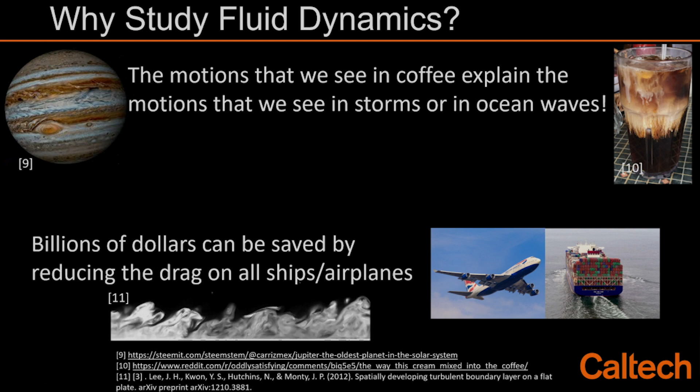Here you can see two different aspects: planetary things like Jupiter, and things as small as in a cup of coffee. There's also billions of dollars you can save if you understand turbulence, like the drag that certain bodies experience moving against oceans or air.

If you've all heard about air resistance or drag, that's one thing we want to try to work on. There are several ways to study fluid dynamics. The first is going through an analytical route, which is what people have been doing for maybe the past couple hundred years, and it involves studying the equations of motion that govern fluid dynamics.

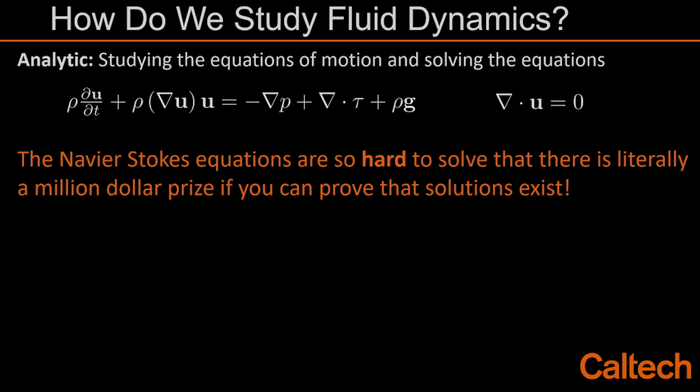These equations, the Navier-Stokes equations, are so hard to solve that there's literally a $1 million prize for anybody who can just prove a solution exists. It seems pretty trivial, but there's actually a lot of math going on. There are several branches of math you need to understand to understand this equation.

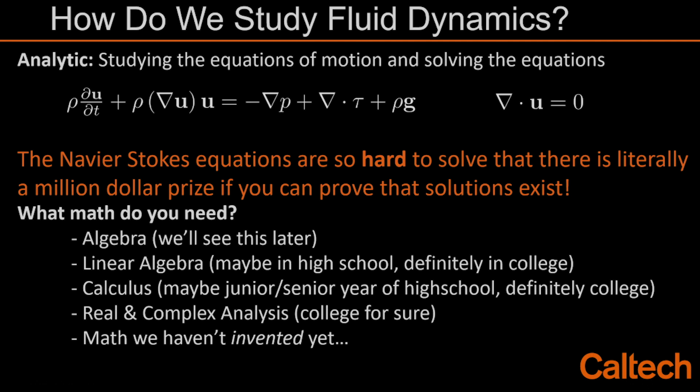You need to understand algebra, and I'll show you an example of how we need it. You need linear algebra, which you'll maybe see in high school but definitely in college. You need calculus, which you'll see at the end of high school and maybe the beginning of college. You also need real and complex analysis, seen at the end of a college math degree. And finally, there's math we haven't even invented yet—avenues we haven't explored that can still be discovered.

Because the fluid dynamics equations are so hard to solve, but we still have to deal with them, there are several ways we can get away without solving the equations directly. The first way is by simulating the problem with computers.

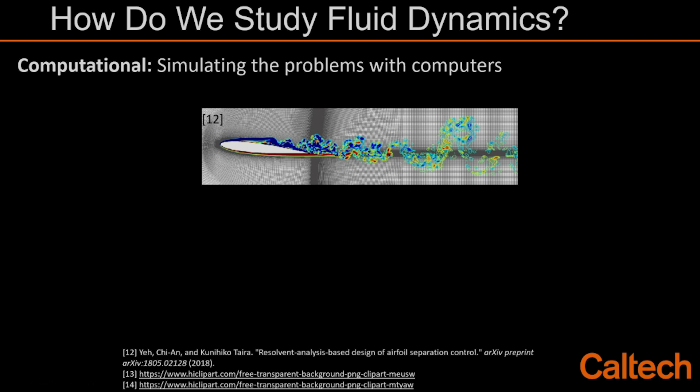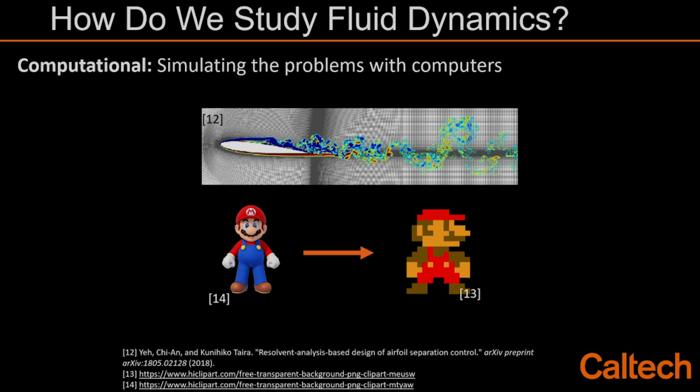One way to think about this is a video game. On the left, we see a pretty rendered image you'll probably see on a Nintendo Switch. On the right is what I grew up with, and maybe your parents grew up with, playing video games. You can see how boxy and square the one on the right is, and how smooth the one on the left is. We can think of the one on the right as a simulation because it's supposed to represent the one on the left.

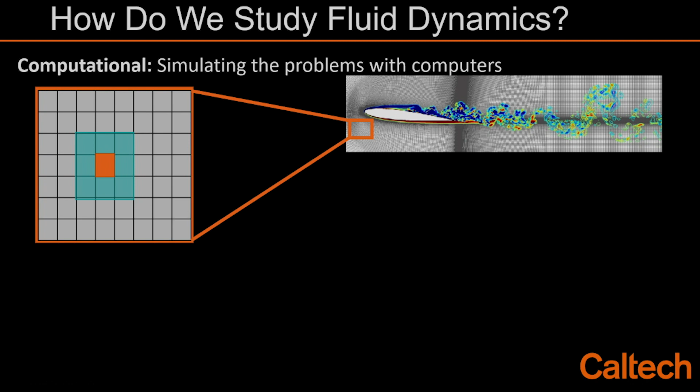The way it's done is the simulation takes a field—for example, the air around the airplane wing—and breaks it up into little squares, tiny cells. Then it basically does algebra: it takes one cell, and based on the cells around it, solves for what's going on. Because you're simulating on these tiny little cells, you can treat the problem as an algebra problem, and all you have to do is solve these algebra problems for everything on the field.

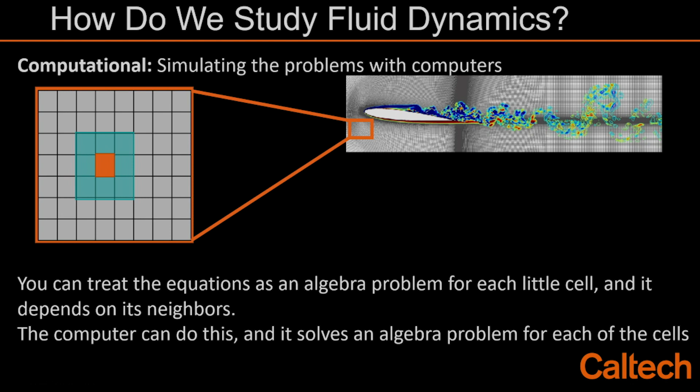Back in the day, if you watched Hidden Figures, this is something people actually had to do by hand—there were whole offices of people computing these things by hand. But nowadays computers can do this for you. They're so efficient that they can compute all these algebra problems in a matter of minutes or seconds, simulating the flow around an airplane wing.

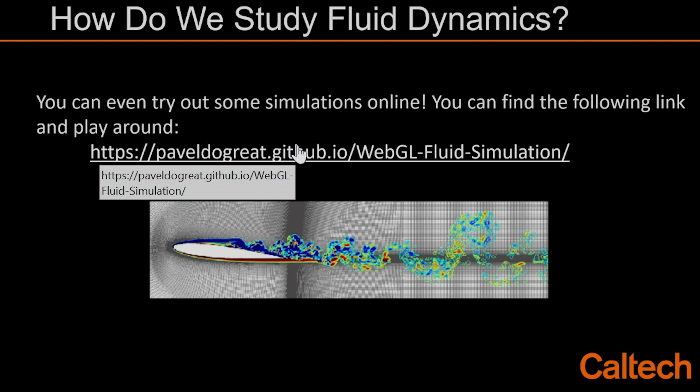We can also see examples of these simulations, like this one we can access online by clicking the following link. In this simulation, we have fluid inside a square container, and if we move the cursor around, we can simulate what it'd be like to mix the fluid. You can probably try this at home by clicking the link, or even with a cup of milk and some food dye, tracing it around to get similar pictures.

The last way is doing things by experiments, where we take measurements in a controlled laboratory setting to simulate something in the real world. So again, we have the airplane wing, and we have air coming to the right of it.

This is what experimentalists look at. They put a bunch of particles in a flow field, let the flow move around it, and trace out where these particles move in the fluid. Usually you need photographs to capture this and see all these particles in motion. You can also think of it like a long exposure photo of a moving light, where you can trace out the light.

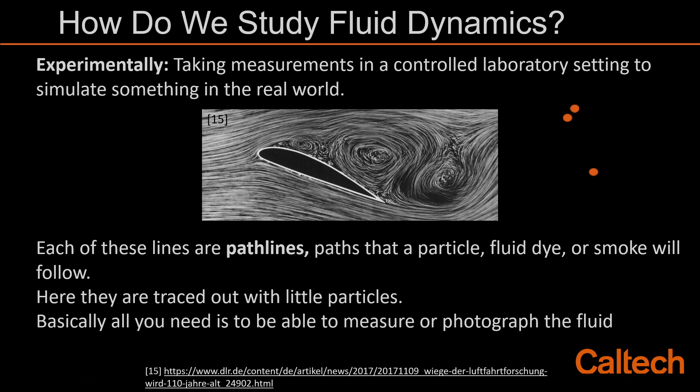So as good as these computations or experiments are, they still have hard parts, some things that keep them from being perfect. Computationally, computers aren't strong enough to simulate everything in the flow—just like the newest video game systems can't simulate every single thing in the real world. That's the trouble we're having with our simulations.

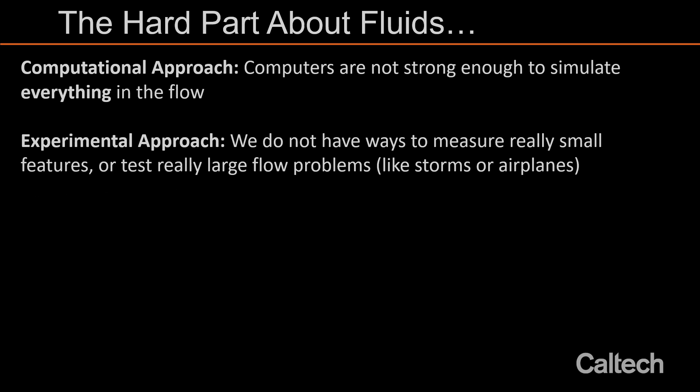Experimentally, the issue is that sometimes there are really tiny features or really big features that are hard to measure. One way to think about this is to consider a shark.

A shark is macro scale, maybe 10 feet long, and it has shark skin that makes it move very efficiently. That skin is micro scale, with features as thick as a human hair. If you really want to understand how a shark moves, you need to understand how its body behaves, but you also have to measure these tiny scales—the skin on the shark—to understand what makes it so efficient at swimming.

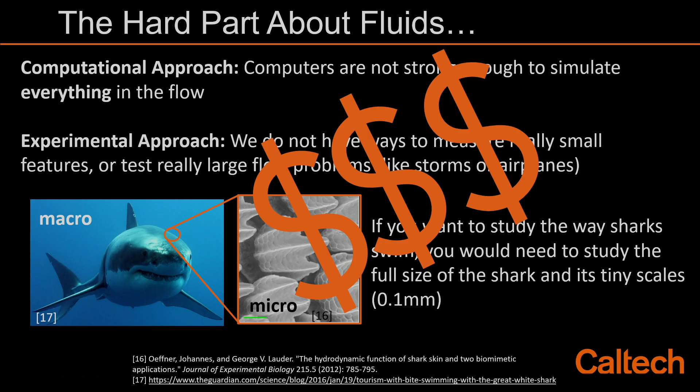What it really comes down to is that it gets expensive. You can probably do this if you throw enough money at it—get a bigger computer or more precise measurements—but sometimes it isn't affordable or practical to do this.

We have to understand the difference between a scientist and an engineer. A scientist tells us what's going on physically, helping us understand the equations, and is interested in understanding more about the natural world. An engineer, on the other hand, tries to solve these problems with the equations, simplifying as much as possible while still holding the relevant physics, to make progress and understand what's going on so you can make designs or predictions.

So what engineers do is try to model the fluid. To understand the Navier-Stokes equations that govern the fluid, we need to understand different fluid properties. Fluids have something called density, which is mass divided by volume—that tells us which fluid is heavier and which is lighter.

One way to think about this is by comparing familiar things, like a baseball and a tennis ball. Although they have about the same volume and size, the baseball is heavier than the tennis ball. This is because the baseball is denser, so it's heavier, and the tennis ball is less dense, so it's lighter.

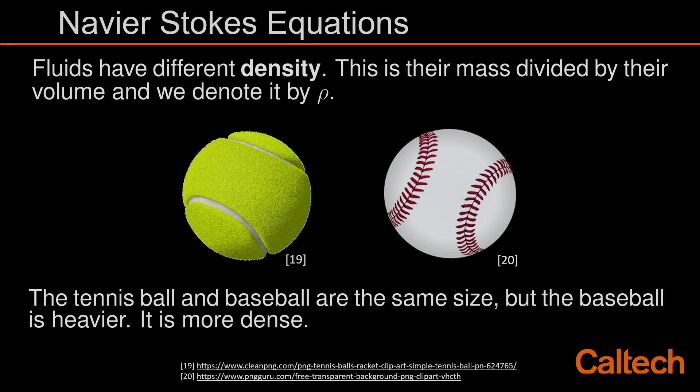You can think about this by considering what's inside the baseball. If you look inside, you'd see a bunch of material, but inside the tennis ball you'd see basically just the casing and air. Because of this, the baseball has more stuff, so it's more dense, whereas the tennis ball has less stuff and is less dense.

We can also understand how this works if we think about hot air. In a hot air balloon, you heat the air, and because it gets hotter, it rises. So hot air becomes less dense, and it's able to float when it's around cold air.

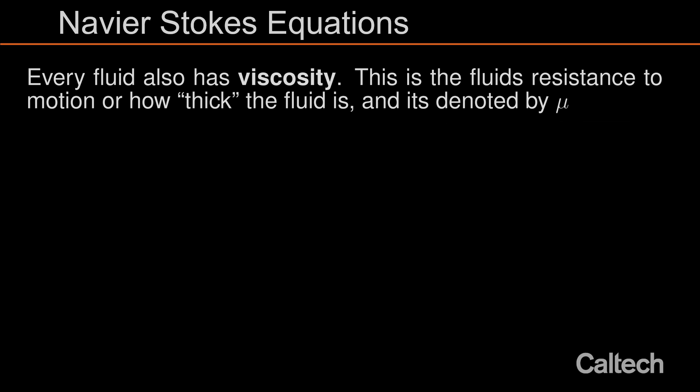The next of these properties is viscosity. Basically, viscosity is the resistance to motion. What we sometimes think about is how thick the fluid is, and we denote it by mu.

Another way you can think about viscosity is the difference between walking in our everyday environment where we're surrounded by air and walking in a pool where you're surrounded by water. If I walk around here, I have no issue and I'm able to move pretty freely. But if I walk around in a pool, I have to really struggle to move my body because I have to move against the resistance of the water. You can also think about this if you're trying to mix a cup of water versus a cup of honey.

The next thing we look at with fluids is their velocity, which is basically how each part of the fluid moves. There are different ways we can visualize the velocity, but ultimately this is what we try to capture with the Navier-Stokes equations. Basically, the Navier-Stokes equations are force equals mass times acceleration, so they're Newton's laws applied to a fluid.

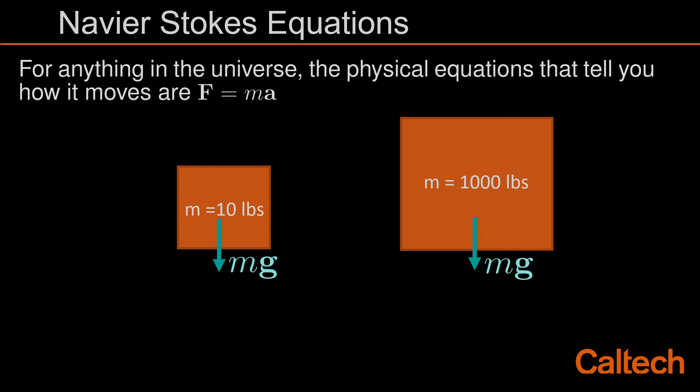So what F equals ma tells you is how much force I need to apply to move an object. Here I have two different boxes, one is 10 pounds and one is 1,000 pounds. Because they're on Earth, they have weight due to gravity, so they have a force due to gravity. If I want to move the boxes, I need to apply different forces. To move the 10-pound box, I need less force than to move the 1,000-pound box. So if you really want to move these boxes, you need to overcome their weight.

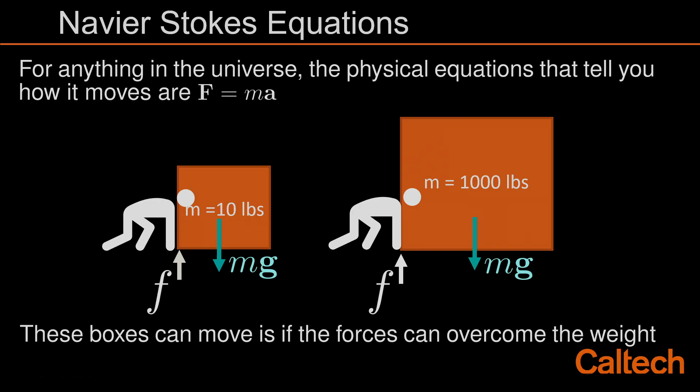There are several forces that act on a fluid. The first of these is pressure, the force from the fluid atoms as they move around, so it feels like something's pushing against the walls. Here in this balloon, we see all the little fluid particles bouncing around, trying to expand and push against the balloon. That's why when you blow air into a balloon, it expands, because the air molecules are bouncing around, pushing against those walls.

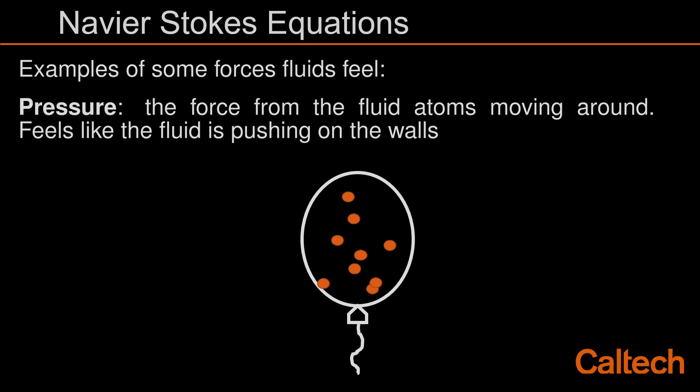If we put all of that together, we get the Navier-Stokes equations, and we can dissect each part. The first one on top basically tells us what comes in must go out. The second one is a little more complicated: force equals mass times acceleration. The stuff on the left-hand side is the mass and acceleration, where density comes in. On the right-hand side, we have all the forces: pressure differences, viscosity, and effects of gravity and density.

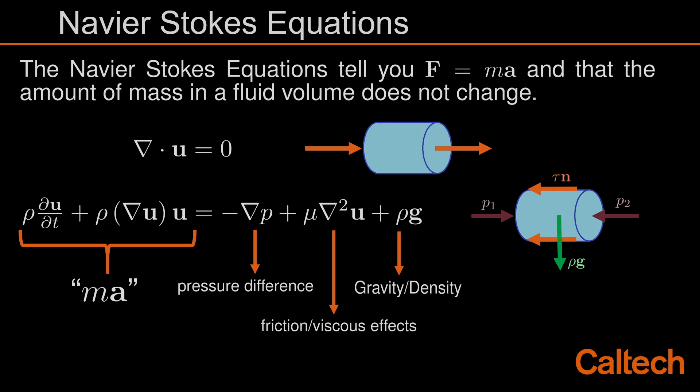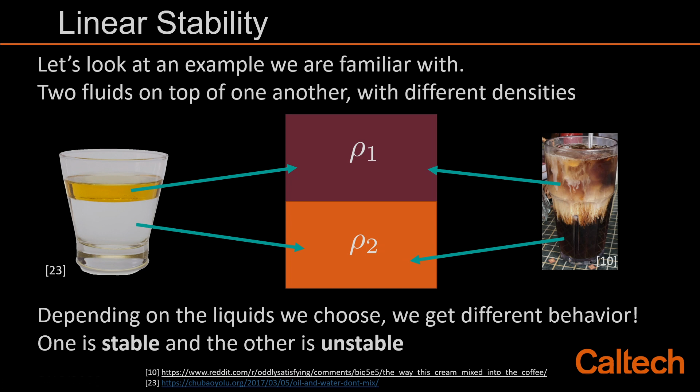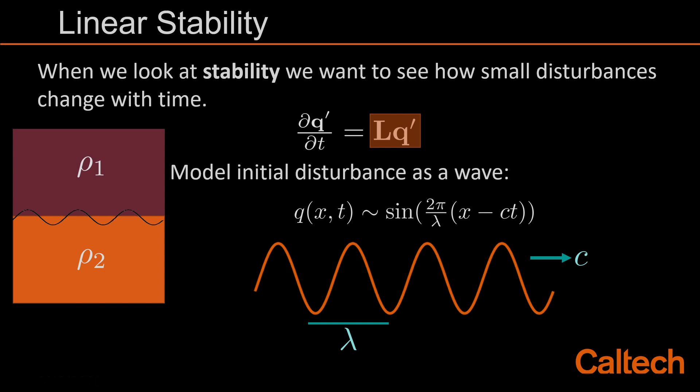So when we try to understand this, we call this stability. So we try to look at these linearized equations, and we try to model a disturbance between the fluid as a wave. So it has some characteristic length and some characteristic speed. And what we're interested in seeing is how this wave will grow as a function of time.

And it turns out that it grows by a growth factor. This growth factor will tell us if it's stable or unstable. So if it's stable, the disturbance won't grow. But if it's unstable, the disturbance will grow.

And we can look at this physically. So in the case where the disturbance doesn't grow, you can think about this as nice calm ocean waves. So when the ocean is really calm, like there's no storm or anything like that, you'll have that the waves just oscillate pretty nicely and they don't grow, they don't change, they just stay nice and uniform.

And we can also think of another case where it's also stable, such as when you have the oil and the water. So here, any disturbance between the two surfaces of the water, of the oil and the water, will just decay and shrink.

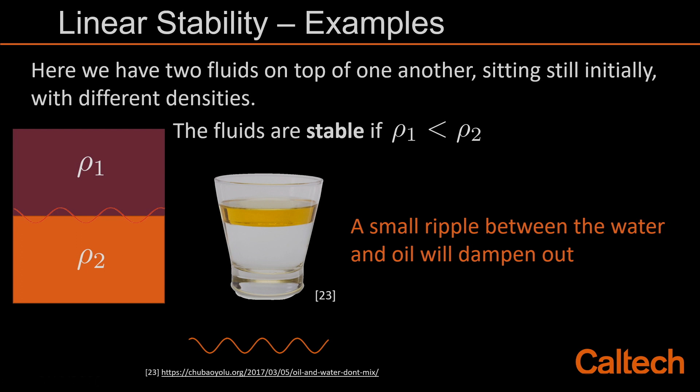But you can also have something unstable. This is when you have milk and coffee. If the milk is more dense than the coffee on the bottom, you actually get it to start sinking, and you get mixing.

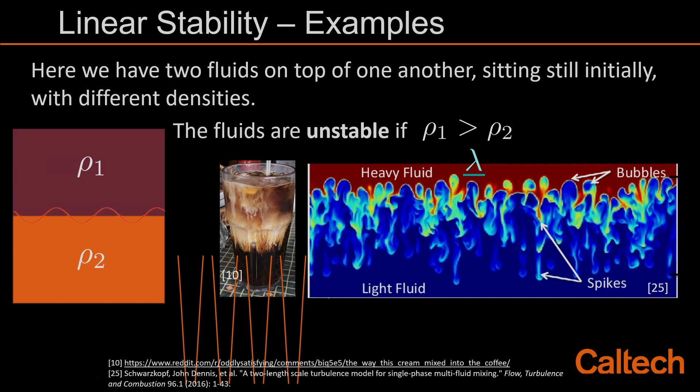If you look at the two, here's a close-up of what's going on between the water and the coffee, and between the coffee and the milk. You can see it starts shrinking, and you have some length scales, but you still have stuff sinking down, because the disturbance has grown.

But you can also take advantage of this instability to make some art. A Mexican muralist developed a painting technique that uses these ideas to paint cool textures, using linear instability to develop really nice painting textures.

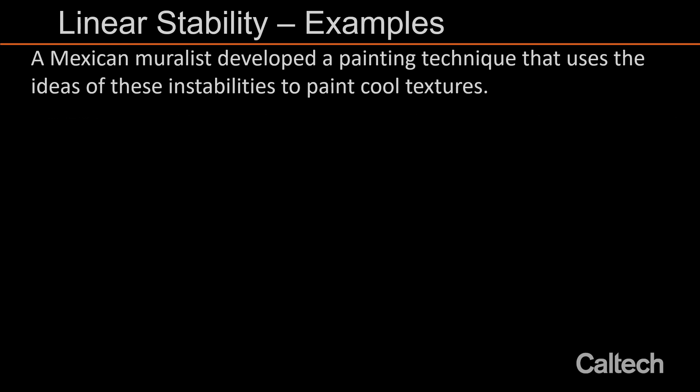The way he's able to make these cool paintings is by placing a heavier fluid on top of a lighter fluid. So you get a heavier paint and put it on top of a lighter paint, then you just let it sit, and you get these patterns that begin emerging.

Here you can see how you have the white paint on top of the black paint, and then these patterns just start to emerge.

You can actually do this at home if you have two different paints. All you have to do is figure out which one's more dense—usually the dark one is less dense. Pour a thin layer of paint, then pour another thin layer on top of that one. After a minute or two, the features will start to appear before it dries. You can try this at home and hopefully recreate some of these cool paintings.

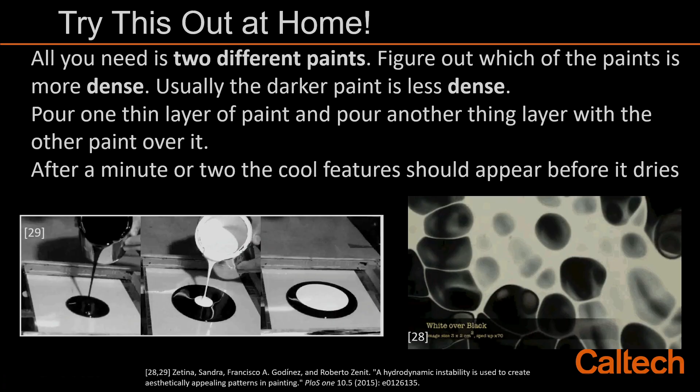Now we'll get to a little bit about what I do in my research. In my research, we try to understand turbulence—that's where you have a disturbance that basically grew out of control, and now there's a lot of mixing going on. When people usually think about turbulence, they think about airplanes when they started getting dizzy.

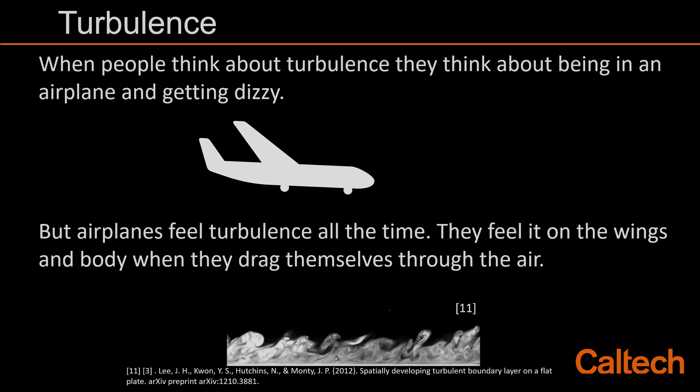You've probably encountered this if you've been unfortunate enough to be in an airplane that starts shaking. But the turbulence we're interested in is the turbulence that is around an airplane at all times. This turbulence is usually seen on the wings of the airplane or on the surface, and it's caused when the airplane tries to fly against the air.

As it tries to displace the air around it, it starts to drag on this air, and because it's going so fast, it causes a lot of mixing. This ends up causing a lot of drag, and it ends up costing airline companies and shipping companies billions of dollars, because this drag costs so much in fuel.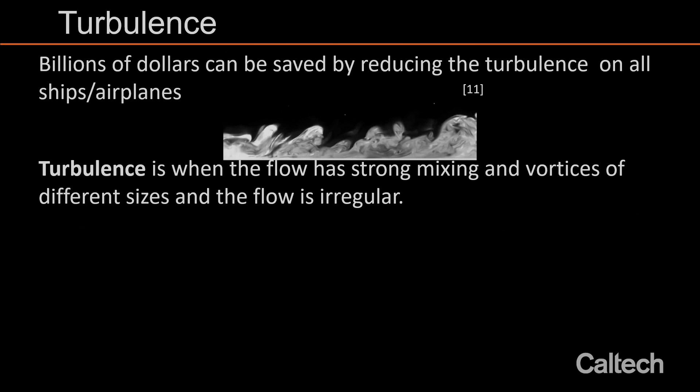Turbulence is basically when flow is characterized by strong mixing and vortices of different sizes, and the flow is very irregular. Vortices are basically swirling fluid, and a lot of people used to think about this as randomness, but there's order to the madness.

Some people think about it by identifying things of different sizes. In this drawing, you can think about different vortices, different swirling fluids of different sizes—really small vortices near the bottom, and larger vortices at the top.

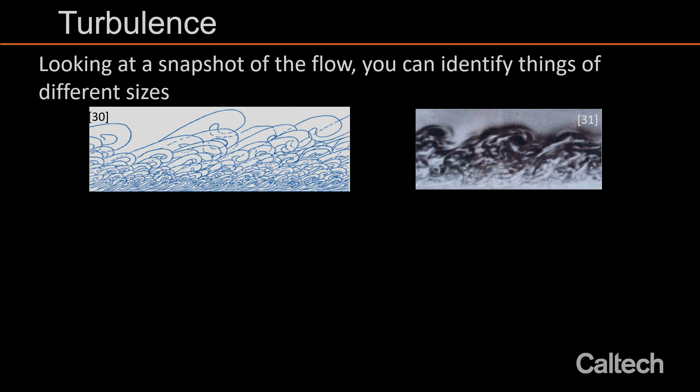This makes sense when you look at experimental snapshots—near the bottom there's a lot of mixing and really tiny features, but outside of the snapshot there are really big vortices. If you recall the shark, we can think about the smaller vortices being affected by the shark skin, and the bigger vortices being affected by the bigger parts of the shark.

If we really want to understand what's going on at the small scale, we should probably target the smaller vortices. This is a really hard problem to solve.

One way we can start to make progress is by borrowing some ideas from image compression. When you take a picture, you save a bunch of numbers representing each part of the picture, known as a pixel, and save that as a file. If you have a megapixel, that ends up being 1 million numbers saved.

If you want to take a bigger picture, you have to get a bigger file size. So to decrease the size of that file, you can try to compress the image. That entails breaking up the picture into a bunch of different snapshots. When you want to recreate the picture, you add it all up. So if we wanted to draw the cat, we'd break up the cat into a bunch of tiny snapshots, add them up, and then we'd have the cat again.

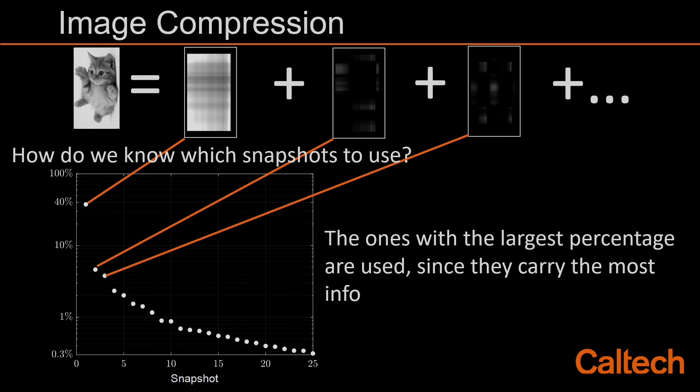What if we use some of these ideas in understanding turbulence? What if we're able to take a turbulent field and create some snapshots so that we don't have to understand all the details of the turbulence, but just the really important parts?

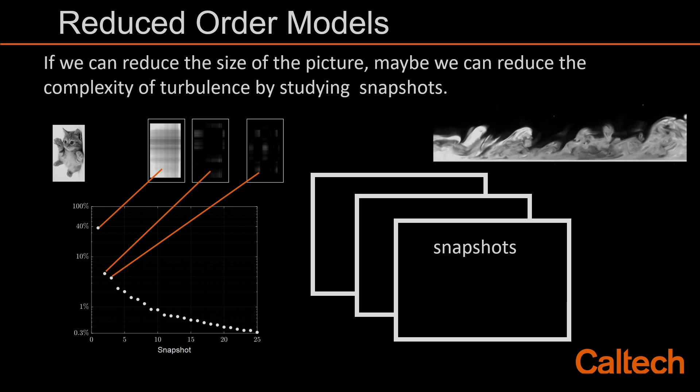For that, you need to find a way to recreate these snapshots. One way people recreate the snapshots is by using the data, using basically the same idea as with the picture of the cat, and then representing it in different snapshots.

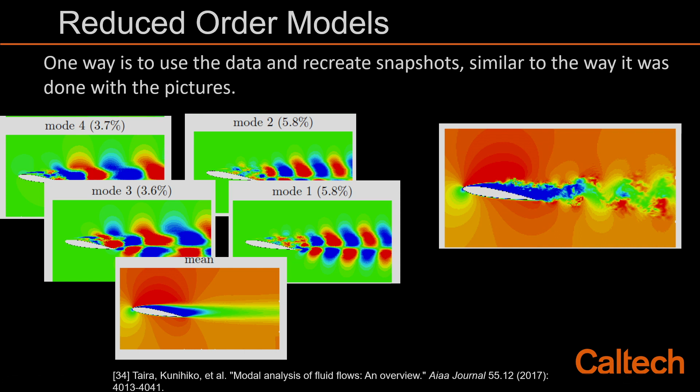You can see that each of these snapshots is trying to recreate this airfoil, and each snapshot has a different part of the fluid or a different part of the behavior. If you add it up, you recreate the image on the right.

Another way is by using the equations. These equations let us separate the fluid into different sized vortices and rank them based on their energy. If you do this for a turbulent field, you get a series of different snapshots that you can use to recreate some of the stuff we see in turbulence.

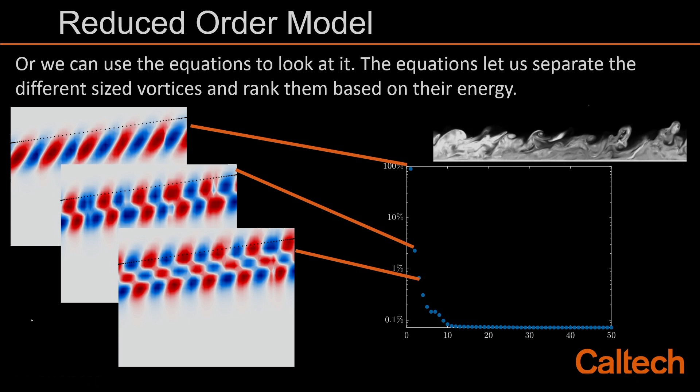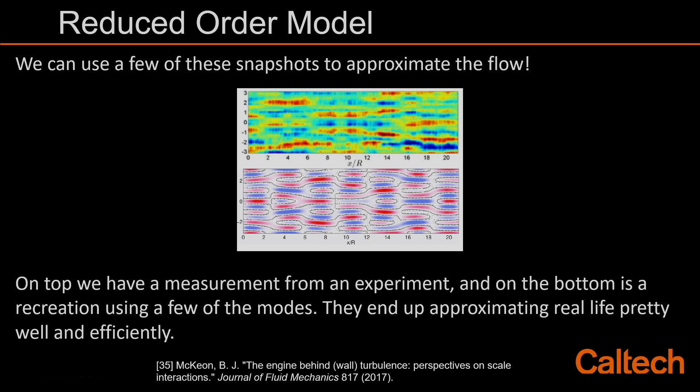The reason we want to use some of these models is because you can target different things with different length scales. So if we know, for example, that we want to see things on the size of a hair, like shark skin, we can try to target that.

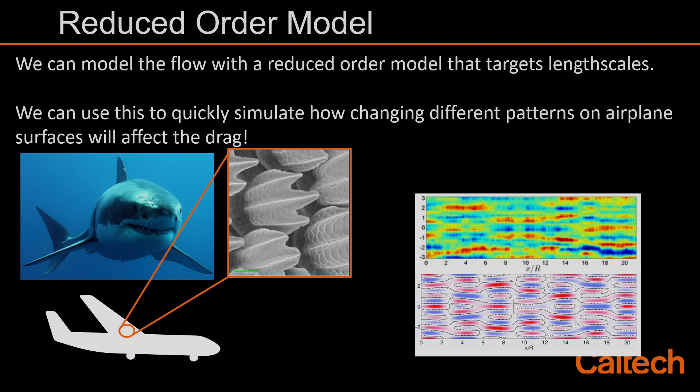It would also let us simulate quickly how changing different patterns affects the field. For example, if we wanted to try out different patterns on the surface of an airplane wing, we might design something similar to shark skin and put it on the airplane. There are several patterns we could use, but using a reduced order model would help us test a lot of these very quickly.

So in conclusion, I just want to repeat the quote again: life is like the Navier-Stokes equations. It may seem complicated at first, but once you identify the important terms, it will become clear how to make progress.

In the first case we looked at, we tried to linearize the flow, making predictions based on the stability of the flow by simplifying the equations. What people do now, more modernly, is look at snapshots of the flow and use those snapshots to recreate the full picture we had.